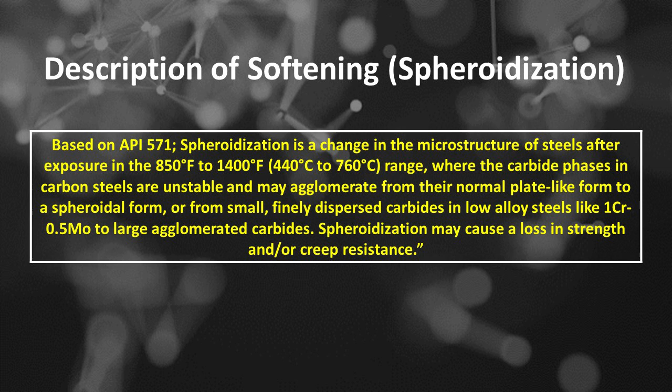Based on API 571, spheroidization is a change in the microstructure of steels after exposure in the 850 to 1400 degrees Fahrenheit, 440 to 760 degrees Celsius range, where the carbide phases in carbon steels are unstable and may agglomerate from their normal plate-like form to a spheroidal form, or from small, finely dispersed carbides in low-alloy steels like 1Cr 0.5Mo to large agglomerated carbides. Spheroidization may cause a loss in strength and/or creep resistance.

Softening, also known as spheroidization, is a type of damage that affects metals, particularly steel. It's a heat treatment-related issue that occurs when the metal is subjected to high temperatures beyond its critical temperature, leading to the breakdown of its microstructure.

In spheroidization damage, the metal's original microstructure is altered, causing the carbides to break down and transform into spherical, spheroid particles. This process occurs at temperatures typically between 550 to 700 degrees Celsius, which is below the melting point of the steel. Characteristics of spheroidization damage include: Number 1, microstructural changes - the formation of spherical carbide particles, replacing the original acicular or lamellar morphology.

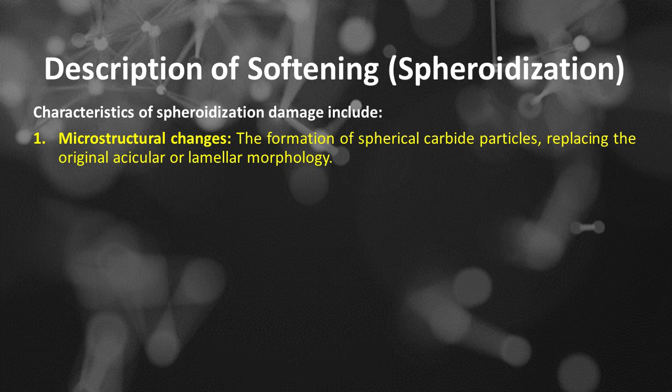Number 2 is grain growth - coarse grain formation due to the high temperatures, resulting in a more porous and less dense microstructure. Number 3 is loss of mechanical properties - spheroidization damage can lead to a significant decrease in the metal's strength, toughness, and hardness.

Number 4 is surface degradation - the formation of surface cracks, blisters, or scales, which can compromise the metal's structural integrity.

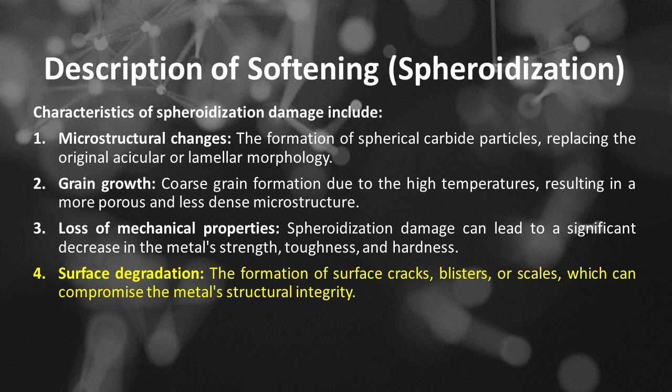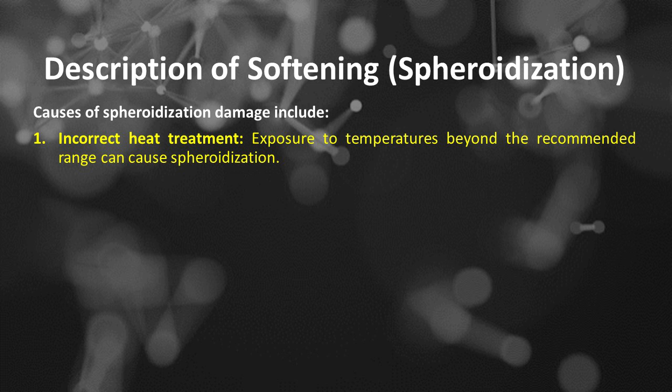Causes of spheroidization damage include: Number 1 is incorrect heat treatment - exposure to temperatures beyond the recommended range can cause spheroidization. Number 2 is insufficient cooling - slow cooling rates can lead to the formation of spheroid structures.

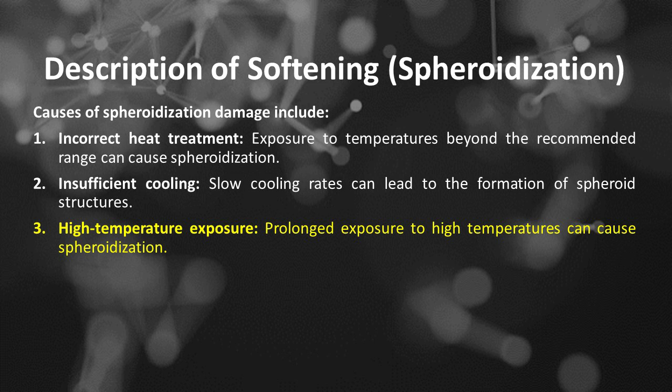Number 3 is high-temperature exposure - prolonged exposure to high temperatures can cause spheroidization. By understanding the causes and effects of spheroidization damage, metalworkers and engineers can take steps to prevent or minimize its occurrence, ensuring the integrity and performance of steel structures and components.

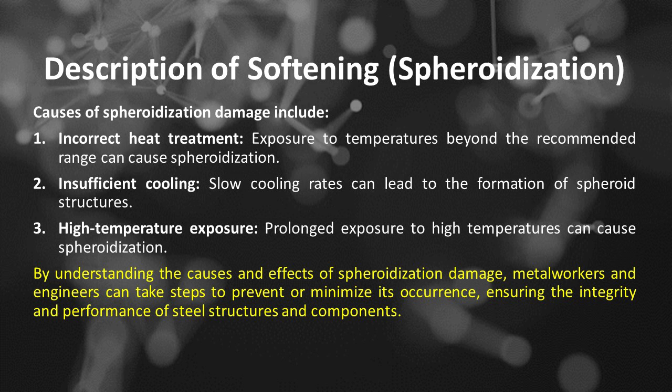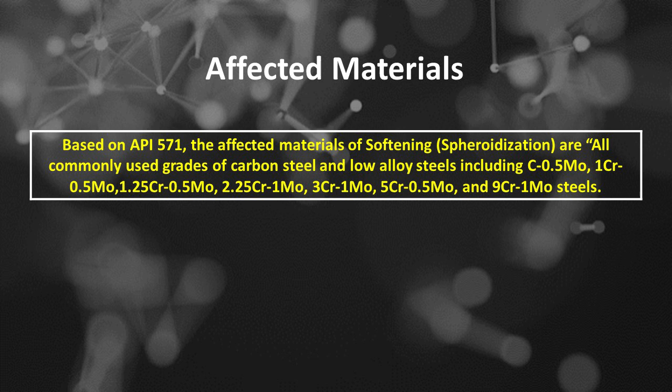Softening or spheroidization affected materials. Based on API 571, the affected materials of softening or spheroidization are all commonly used grades of carbon steel and low-alloy steels, including C 0.5Mo, 1Cr 0.5Mo, 1.25Cr 0.5Mo, 2.25Cr 1Mo, 3Cr 1Mo, 5Cr 0.5Mo, and 9Cr 1Mo steels.

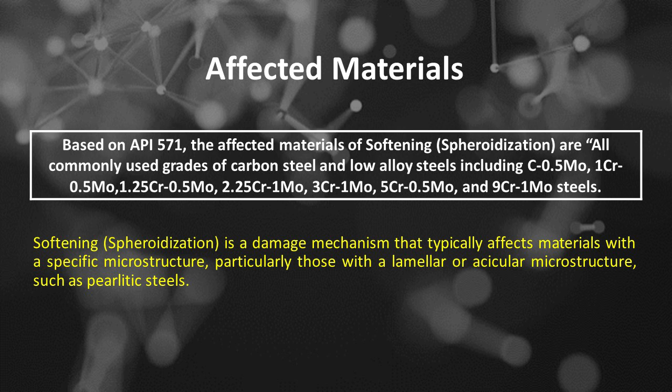Softening, spheroidization, is a damage mechanism that typically affects materials with a specific microstructure, particularly those with a lamellar or acicular microstructure, such as pearlitic steels. The affected materials can include: Number 1, pearlitic steels - steels with a pearlitic microstructure, which consists of alternating layers of ferrite and cementite, are prone to softening due to spheroidization. This includes medium and high-carbon steels, such as AISI 1040, 4140, and 4340.

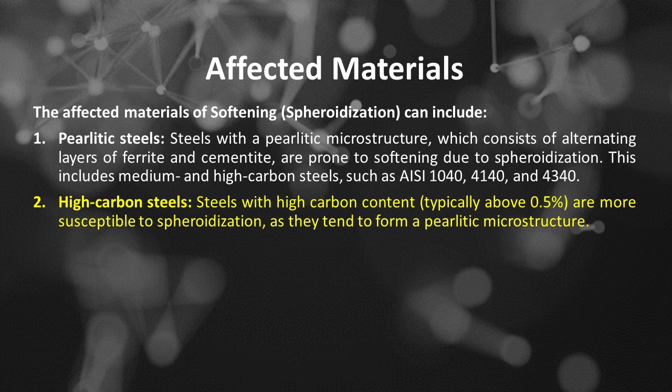Number 2 is high-carbon steels - steels with high carbon content, typically above 0.5%, are more susceptible to spheroidization, as they tend to form a pearlitic microstructure. Number 3 is medium carbon steels.

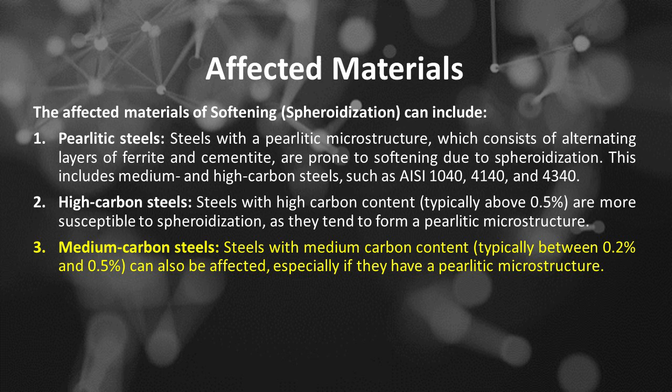Steels with medium carbon content, typically between 0.2% and 0.5%, can also be affected, especially if they have a pearlitic microstructure. Number 4 is some alloy steels.

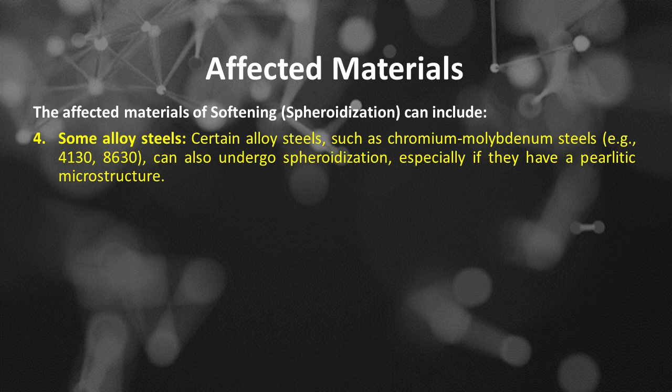Certain alloy steels, such as chromium molybdenum steels, e.g., 4130, 8630, can also undergo spheroidization, especially if they have a pearlitic microstructure. Number 5 is cast irons - some types of cast irons, such as gray cast iron, can also be affected by spheroidization, although this is less common.

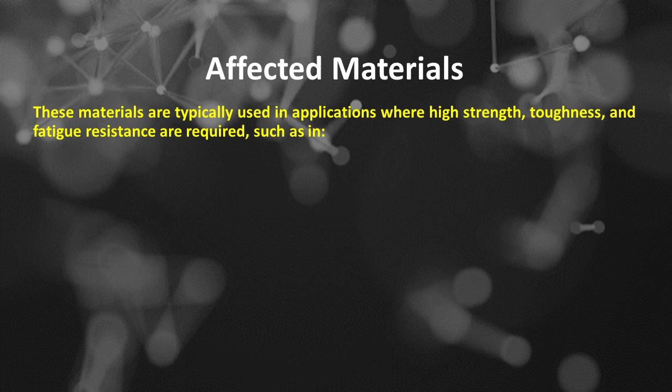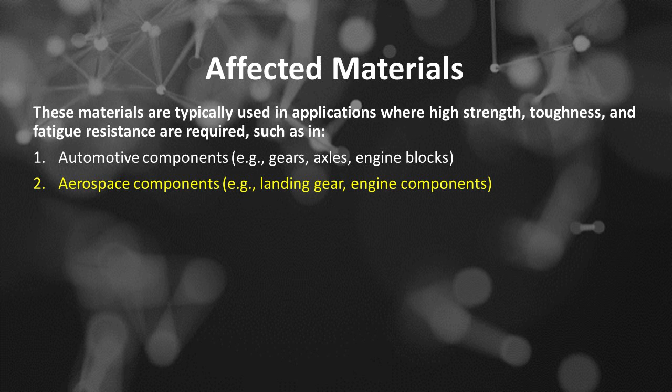These materials are typically used in applications where high strength, toughness, and fatigue resistance are required, such as in: Number 1, automotive components, such as gears, axles, engine blocks. Number 2, aerospace components, such as landing gear, engine components. Number 3, industrial equipment, such as pumps, valves, gears. Number 4, construction equipment, such as cranes, excavators.

It's worth noting that not all materials with these compositions will necessarily undergo spheroidization, as the susceptibility to this damage mechanism also depends on factors like processing history, heat treatment, and operating conditions.

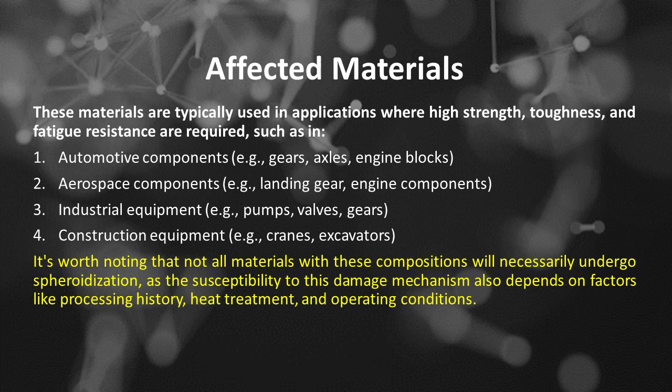Critical factors of the softening or spheroidization damage mechanism primarily refer to the process that occurs in materials, especially steels, during heat treatment or prolonged exposure to high temperatures. This mechanism is crucial in determining the mechanical properties of the material, particularly its hardness, strength, and ductility. Here are some of the critical factors that influence spheroidization.

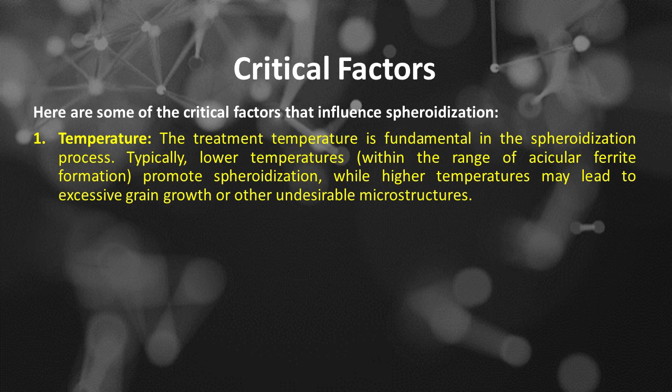Number 1 is temperature - the treatment temperature is fundamental in the spheroidization process. Typically, lower temperatures, within the range of acicular ferrite formation, promote spheroidization, while higher temperatures may lead to excessive grain growth or other undesirable microstructures.

Number 2 is time - the duration of exposure to the softening temperature affects the spheroidization process. Longer times generally lead to more significant spheroidization, changing the distribution and shape of carbide particles within the matrix.

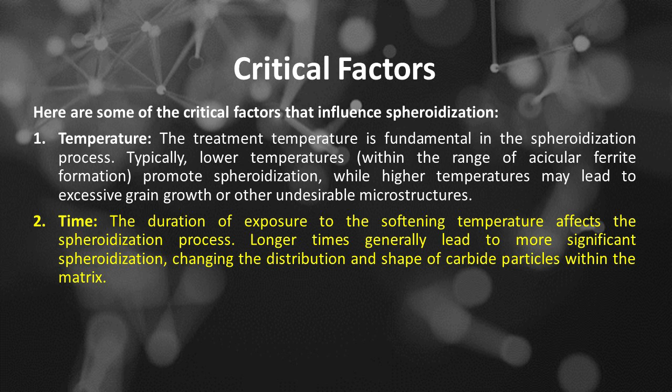Number 3 is initial microstructure - the starting microstructure of the material, lamellar pearlite, bainite, or martensite, plays a critical role in how quickly and effectively spheroidization occurs. Different initial structures respond differently to heat treatment.

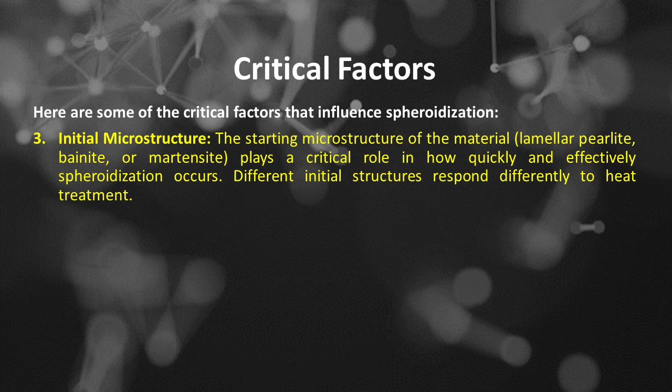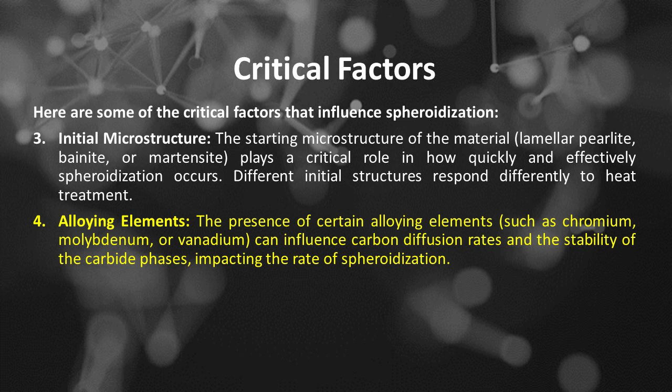Number 4 is alloying elements. The presence of certain alloying elements, such as chromium, molybdenum, or vanadium, can influence carbon diffusion rates and the stability of the carbide phases, impacting the rate of spheroidization.

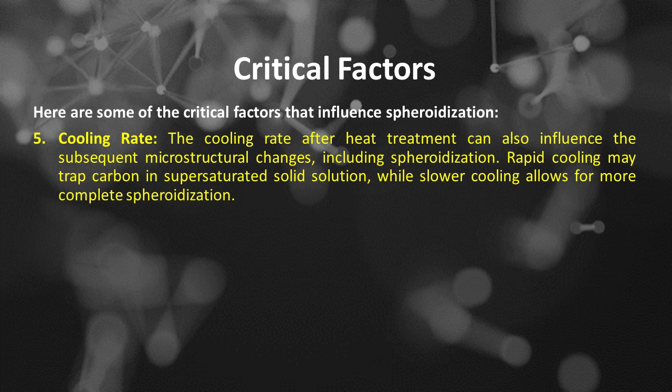Number 5 is cooling rate. The cooling rate after heat treatment can also influence the subsequent microstructural changes, including spheroidization. Rapid cooling may trap carbon in supersaturated solid solution, while slower cooling allows for more complete spheroidization.

Number 6 is stress and strain. Mechanical stresses can impact the kinetics of spheroidization. Stress can promote the movement of dislocations and boundaries, potentially facilitating the dissolution of cementite and promoting spheroidization.

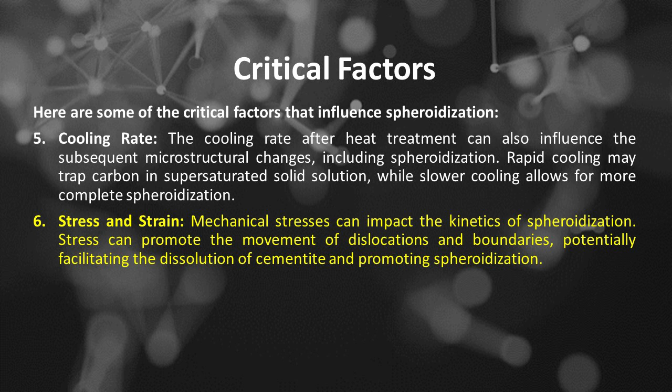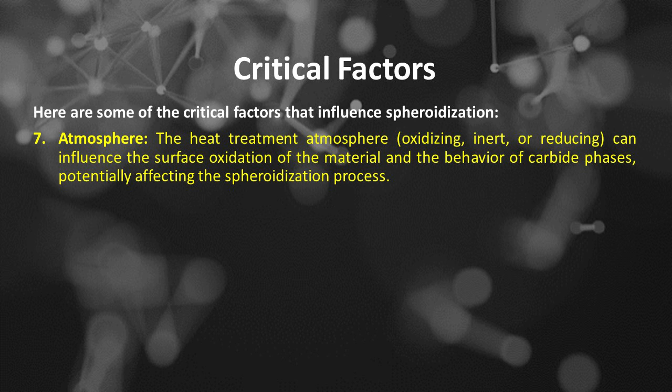Number 7 is atmosphere. The heat treatment atmosphere, oxidizing, inert, or reducing, can influence the surface oxidation of the material and the behavior of carbide phases, potentially affecting the spheroidization process.

Number 8 is grain size. The initial grain size of the material can impact its overall mechanical properties and also how easily the spheroidization process occurs. Finer grains may facilitate faster diffusion and spheroidization processes.

Understanding these critical factors is important for controlling the properties of steel and other materials through targeted heat treatments, allowing for optimization for specific applications in mechanical engineering and materials science.

Affected units or equipment of softening or spheroidization. Softening or spheroidization is a damage mechanism that can occur in equipment and systems that operate at high temperatures, particularly in the context of steam power plants, fossil fuel power plants, and other industrial processes. The affected units or equipment of softening, spheroidization damage mechanism include:

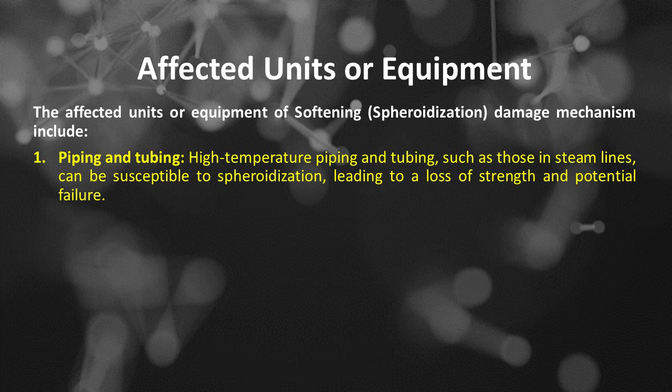Number 1 is piping and tubing. High-temperature piping and tubing, such as those in steam lines, can be susceptible to spheroidization, leading to a loss of strength and potential failure. Number 2 is boiler components.

Boiler headers, tubes, and other components can be affected by spheroidization, particularly in areas with high heat flux and temperature gradients. Number 3 is heat exchangers.

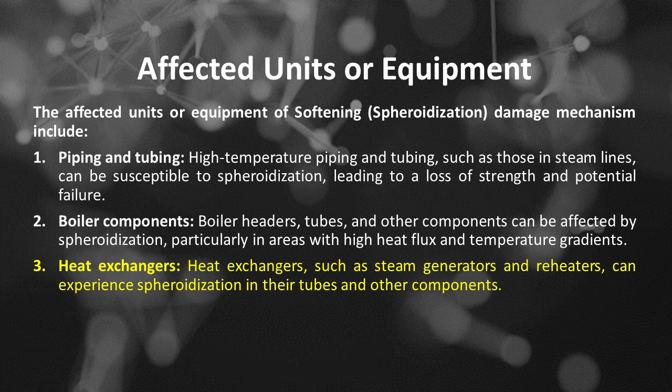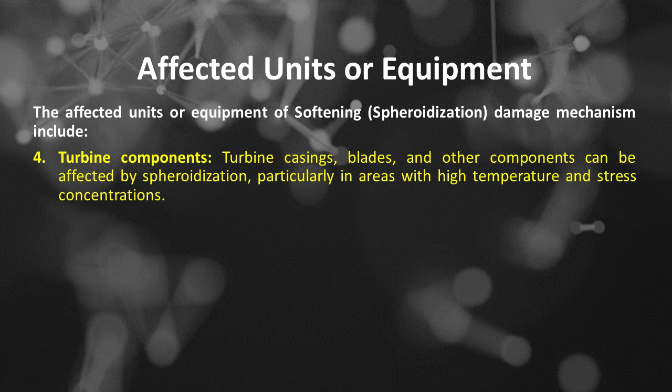Heat exchangers, such as steam generators and reheaters, can experience spheroidization in their tubes and other components. Number 4 is turbine components. Turbine casings, blades, and other components can be affected by spheroidization, particularly in areas with high temperature and stress concentrations.

Number 5 is superheater and reheater coils. These coils can be susceptible to spheroidization due to the high temperatures and thermal gradients they experience.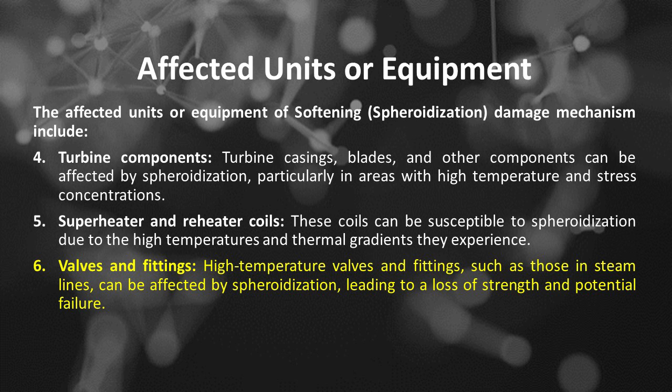Number 6 is valves and fittings. High-temperature valves and fittings, such as those in steam lines, can be affected by spheroidization, leading to a loss of strength and potential failure. Number 7 is headers and manifolds.

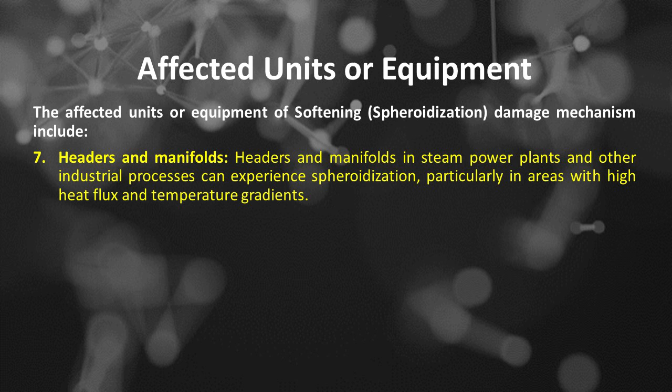Headers and manifolds in steam power plants and other industrial processes can experience spheroidization, particularly in areas with high heat flux and temperature gradients. These are some examples of the equipment and systems that can be affected by softening, spheroidization damage mechanism. It's essential to note that the specific affected units or equipment may vary depending on the industry, process, and operating conditions.

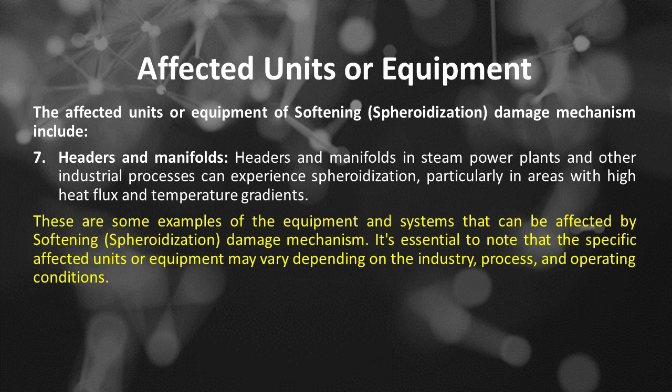Appearance or morphology of softening or spheroidization damage. Based on API 571, spheroidization is not visible or readily apparent and can only be observed through metallography. The pearlitic phase undergoes a time-dependent transformation from partial to complete spheroidization, Figure 4.3 and Figure 4.4.

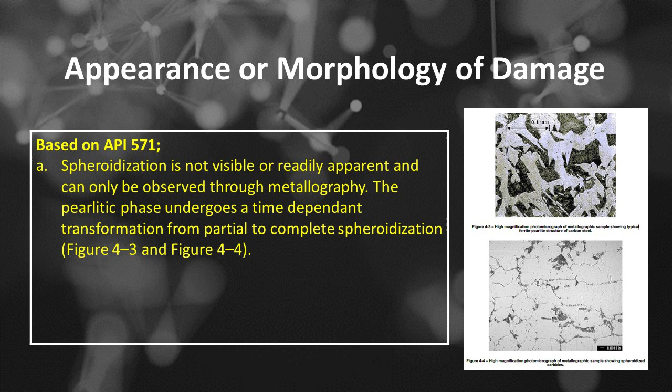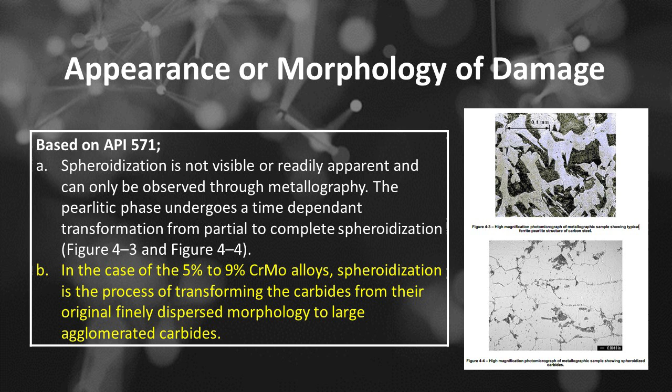In the case of the 5% to 9% CrMo alloys, spheroidization is the process of transforming the carbides from their original finely dispersed morphology to large agglomerated carbides.

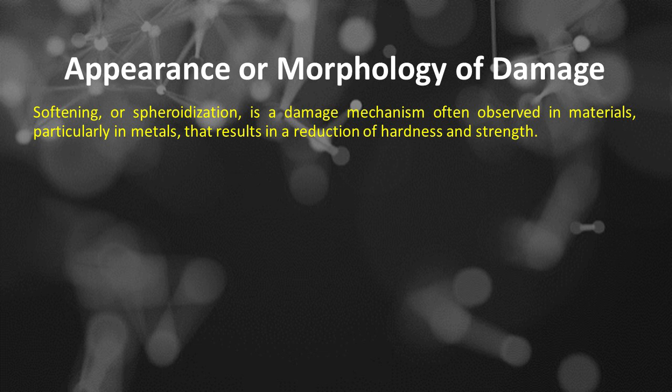Softening, or spheroidization, is a damage mechanism often observed in materials, particularly in metals, that results in a reduction of hardness and strength. This process typically involves the transformation of a material's microstructure, particularly in steels and certain alloys.

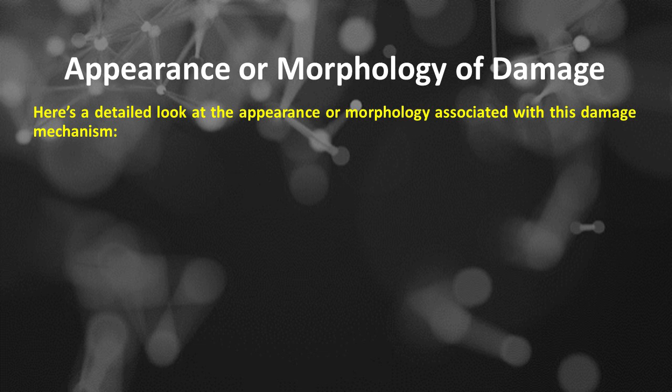Number 1 is microstructural changes. The first of microstructural changes is phase transformation. The microstructure generally transitions from a more complex arrangement, like pearlite or bainite, to rounded particles, spheroids, of cementite, Fe3C, dispersed in a ferritic matrix. This transformation can occur through annealing processes.

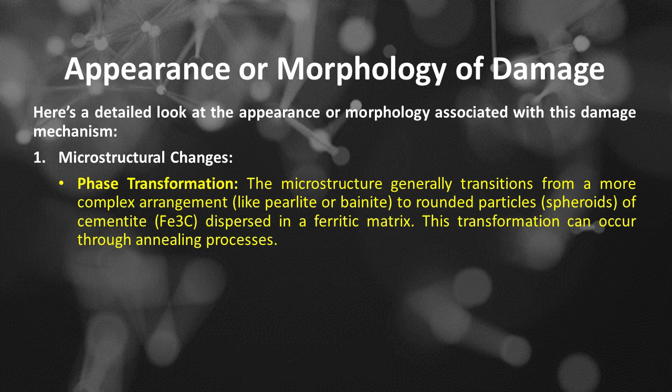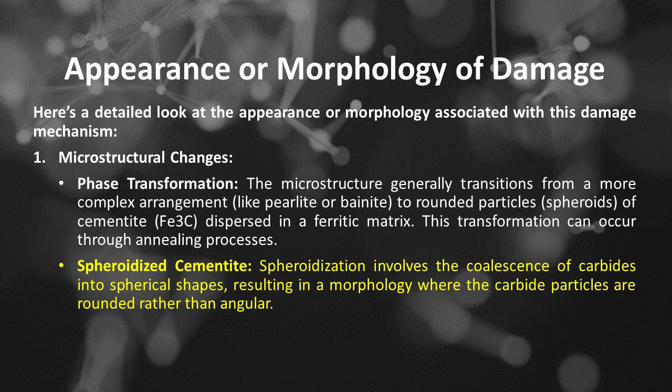The second of microstructural changes is spheroidized cementite. Spheroidization involves the coalescence of carbides into spherical shapes, resulting in a morphology where the carbide particles are rounded rather than angular.

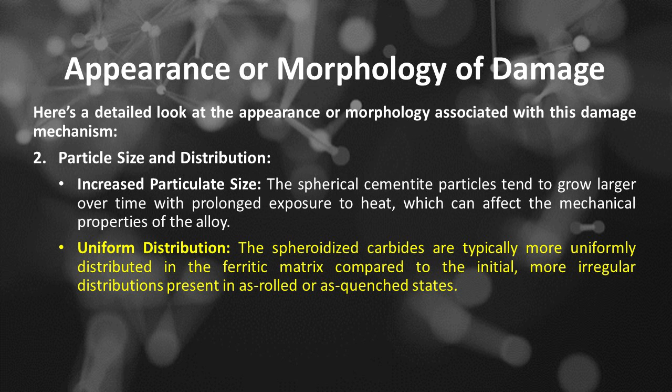Number 2 is particle size and distribution. The first is increased particulate size. The spherical cementite particles tend to grow larger over time with prolonged exposure to heat, which can affect the mechanical properties of the alloy. Uniform distribution: the spheroidized carbides are typically more uniformly distributed in the ferritic matrix compared to the initial, more irregular distributions present in as-rolled or as-quenched states.

Number 3 is reduction in hardness. As the material softens, there is a noticeable decrease in hardness. This can often be seen in hardness tests, where the values drop significantly when comparing spheroidized samples to those in earlier microstructural states, e.g., pearlite.

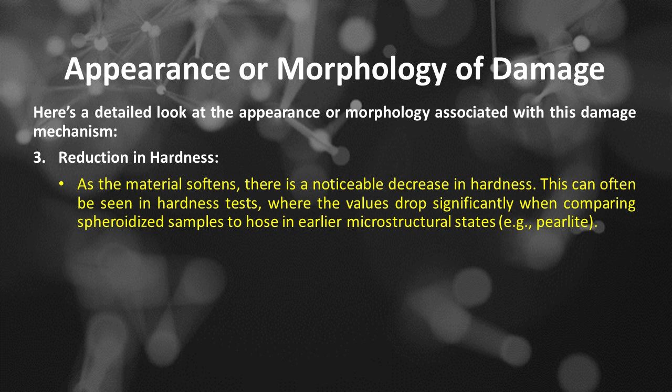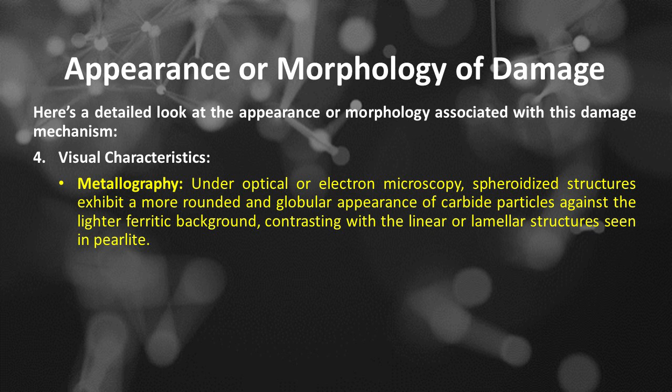Number 4 is visual characteristics. Metallography: under optical or electron microscopy, spheroidized structures exhibit a more rounded and globular appearance of carbide particles against the lighter ferritic background, contrasting with the linear or lamellar structures seen in pearlite. Fractography: in fracture surfaces, spheroidized materials may show signs of ductile fracture with dimples due to the softer matrix yielding under stress.

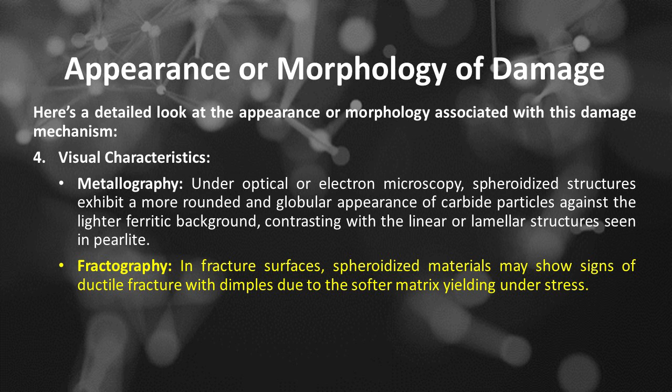Number 5 is temperature and time dependence. Spheroidization is typically promoted by long exposures to elevated temperatures. The degree of spheroidization can vary based on the specific temperatures and times used during the heat treatment process.

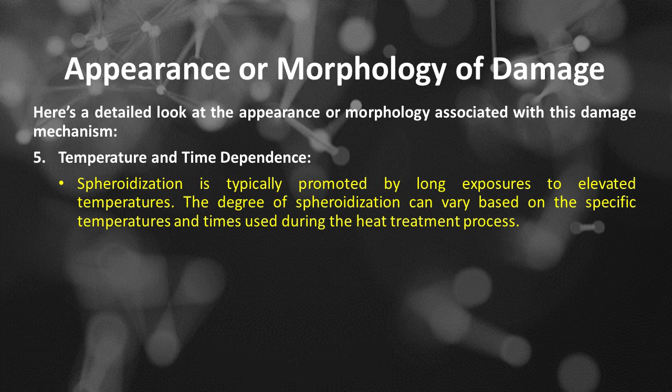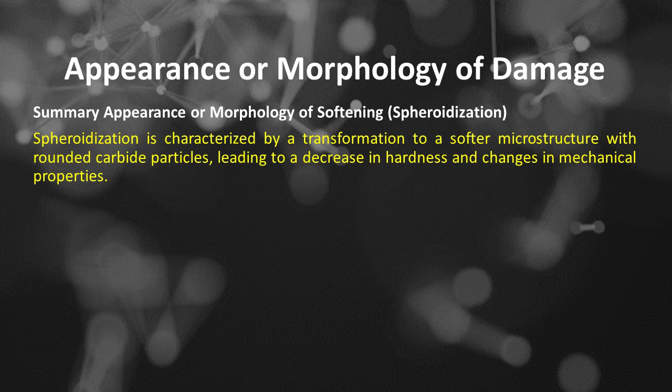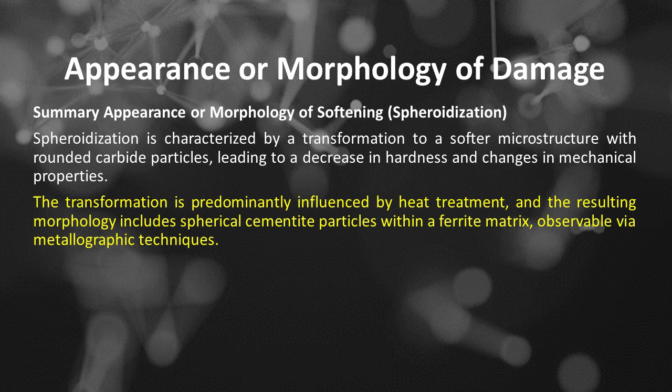Summary appearance or morphology of softening or spheroidization. Spheroidization is characterized by a transformation to a softer microstructure with rounded carbide particles, leading to a decrease in hardness and changes in mechanical properties. The transformation is predominantly influenced by heat treatment, and the resulting morphology includes spherical cementite particles within a ferrite matrix, observable via metallographic techniques.

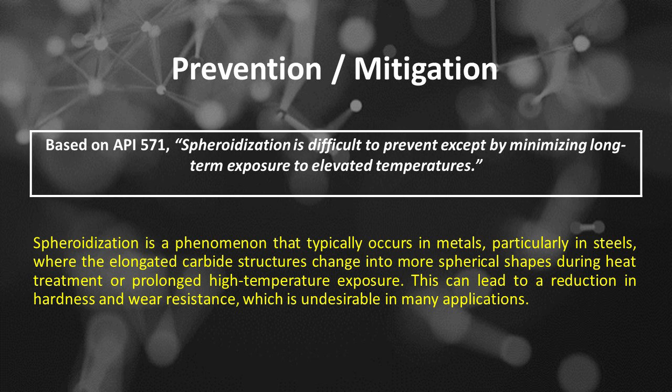Softening or spheroidization prevention or mitigation. Based on API 571, spheroidization is difficult to prevent except by minimizing long-term exposure to elevated temperatures. Spheroidization is a phenomenon that typically occurs in metals, particularly in steels, where the elongated carbide structures change into more spherical shapes during heat treatment or prolonged high-temperature exposure. This can lead to a reduction in hardness and wear resistance, which is undesirable in many applications.

To prevent or mitigate spheroidization damage, consider the following strategies. Number 1 is optimized heat treatment. Use appropriate cooling rates and heat treatment processes. Avoid prolonged exposure to high temperatures where spheroidization can occur. Implement controlled cooling processes after annealing to limit the time the metal spends in the temperature ranges that promote spheroidization.

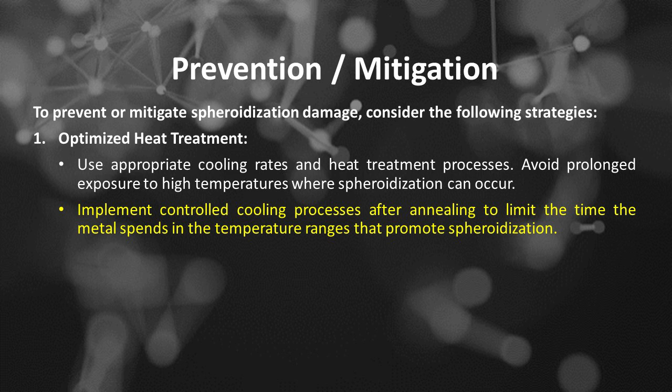Number 2 is material selection. Choose materials that are less prone to spheroidization based on their composition and microstructure. Some alloying elements can enhance resistance to spheroidization.

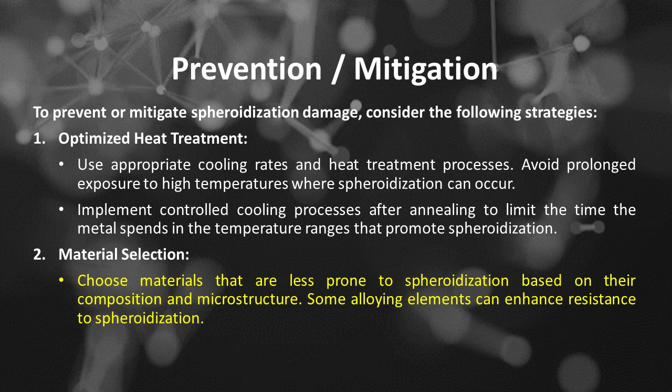Number 3 is intermittent service. If possible, limit the application of high temperatures during service or reduce exposure time to high-temperature environments. Use operational parameters that minimize heating.

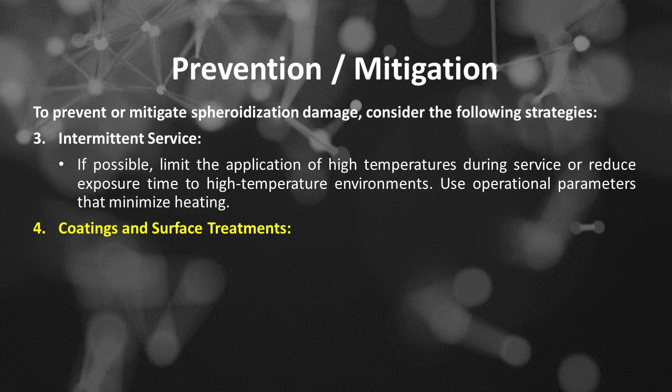Number 4 is coatings and surface treatments. Apply surface coatings or treatments that can protect against high-temperature exposure. These can act as barriers to heat transfer or provide thermal insulation.

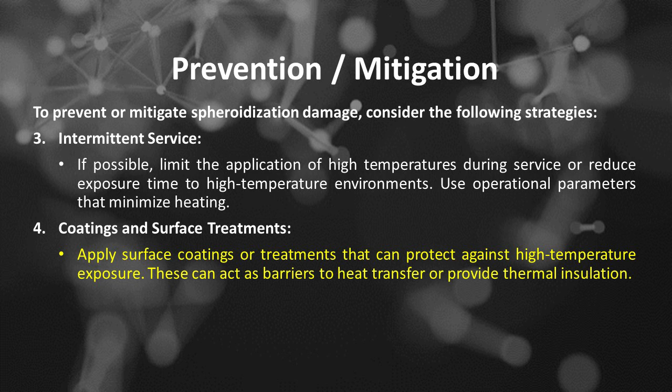Number 5 is microstructural control. Utilize processes such as quenching and tempering to create a microstructure that resists spheroidization. Maintaining a fine-grained structure and preventing the formation of large, elongated carbides can help.

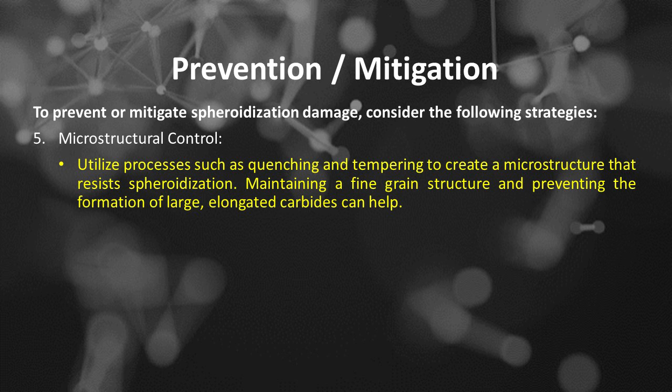Number 6 is regular monitoring and maintenance. Implement regular inspections and testing throughout the life cycle of components to detect early signs of damage or performance degradation.

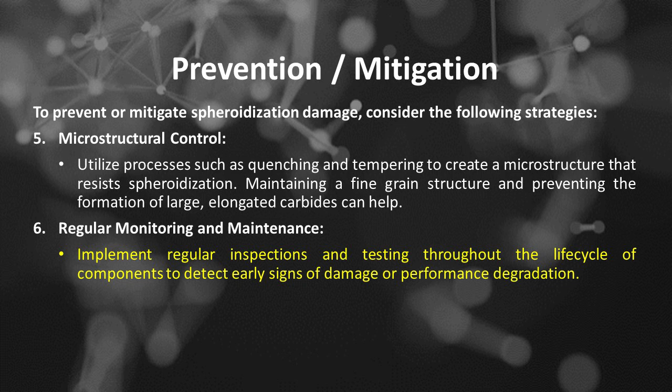Number 7 is design considerations. Incorporate design features that minimize heat accumulation and improve thermal dissipation in critical areas prone to spheroidization.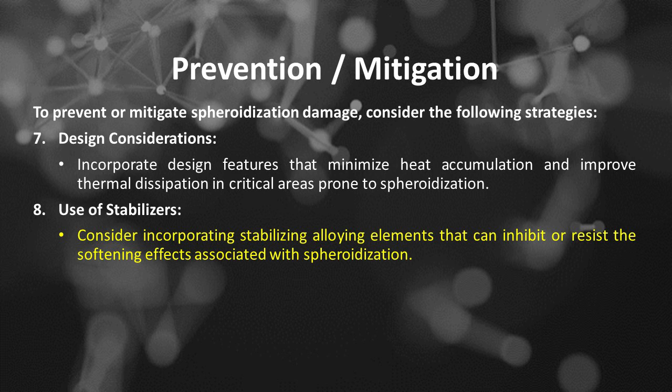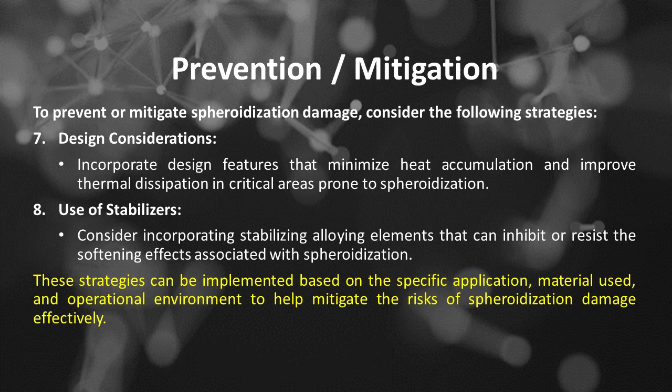Number 8 is use of stabilizers. Consider incorporating stabilizing alloying elements that can inhibit or resist the softening effects associated with spheroidization. These strategies can be implemented based on the specific application, material used, and operational environment to help mitigate the risks of spheroidization damage effectively. Inspection and monitoring.

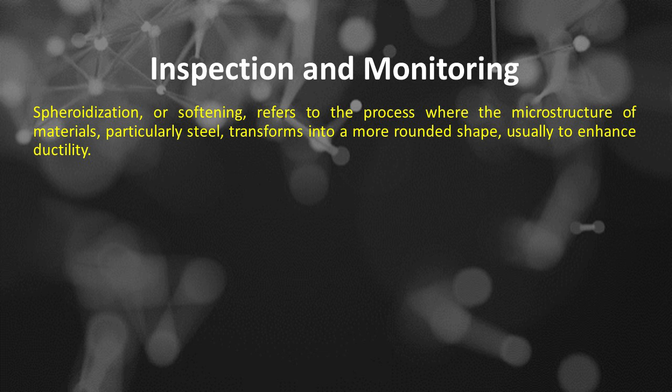Spheroidization, or softening, refers to the process where the microstructure of materials, particularly steel, transforms into a more rounded shape, usually to enhance ductility. This can occur due to prolonged heating, exposure to stress, or inappropriate heat treatment processes. Detecting spheroidization damage can involve several inspection and monitoring methods.

Number 1 is visual inspection. Surface examination. Initial visual assessments of the material can reveal signs of degradation, such as discoloration or irregular surface characteristics.

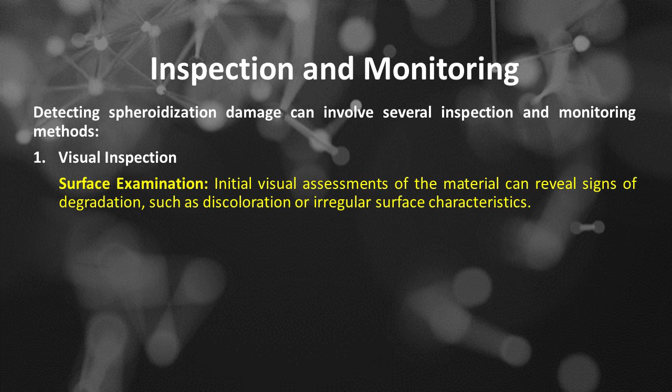Number 2 is metallographic analysis. Microscopy, optical microscopy or scanning electron microscopy, SEM, is used to examine the microstructure. Spheroidization typically shows a rounded grain structure, which can be compared to a standard sample. Etching samples. Preparing samples with specific etching solutions can help highlight microstructural features, making it easier to identify softening.

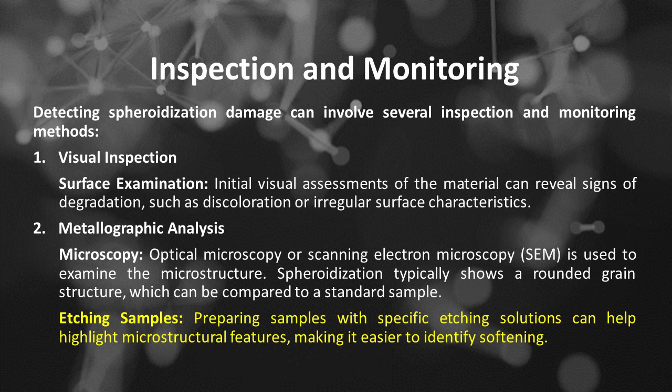Number 3 is hardness testing. Number 4 is mechanical testing.

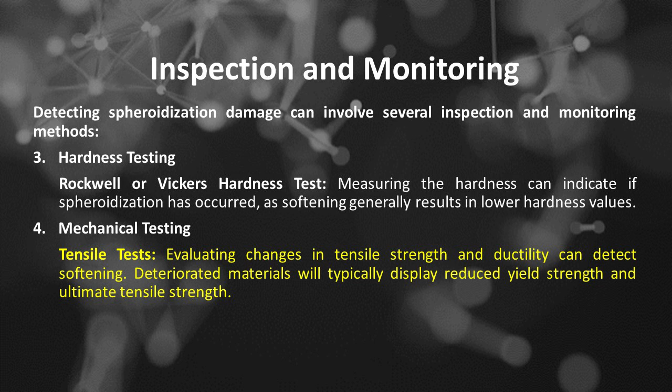Tensile tests, evaluating changes in tensile strength and ductility can detect softening. Deteriorated materials will typically display reduced yield strength and ultimate tensile strength. Impact testing, Charpy impact tests can reflect changes in toughness associated with spheroidization.

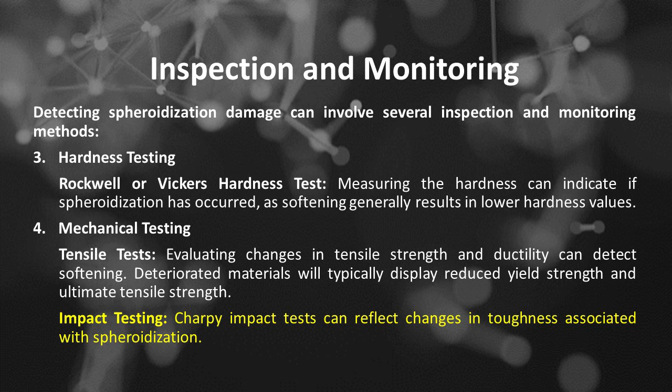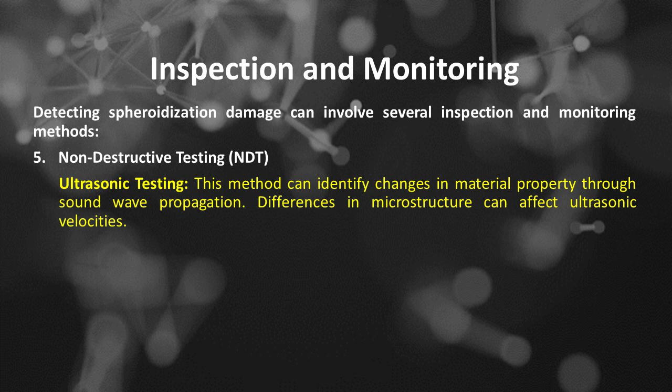Number 5 is non-destructive testing, NDT. Ultrasonic testing. This method can identify changes in material property through sound wave propagation. Differences in microstructure can affect ultrasonic velocities. Eddy current testing. This technique can detect alterations in electrical conductivity related to changes in microstructure and can be used for surface and near-surface assessments.

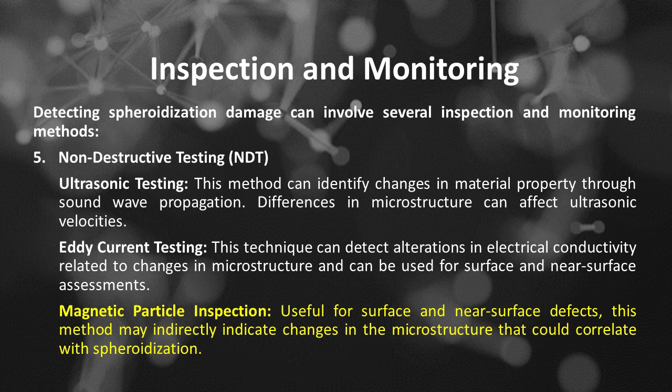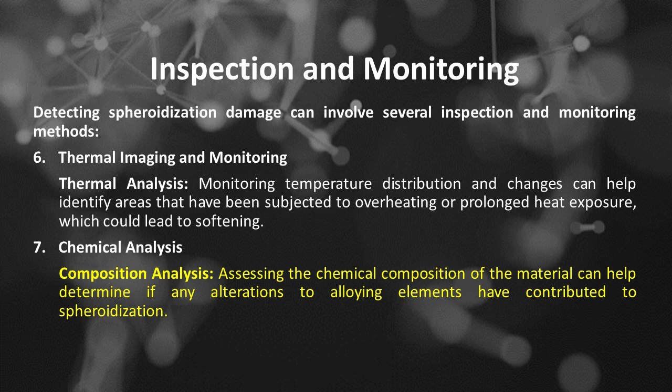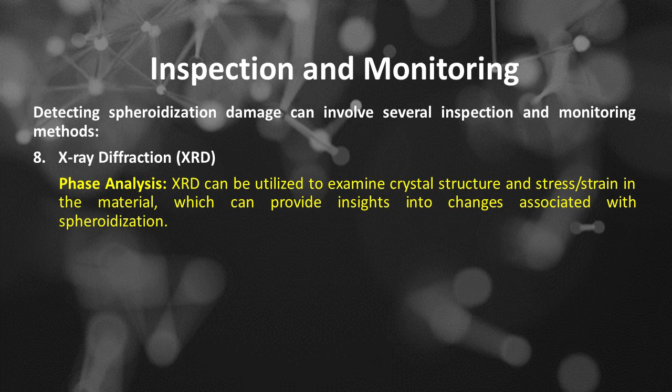Number 7 is chemical analysis. Composition analysis. Assessing the chemical composition of the material can help determine if any alterations to alloying elements have contributed to spheroidization. Number 8 is X-ray diffraction or XRD. Phase analysis. XRD can be utilized to examine crystal structure and stress/strain in the material, which can provide insights into changes associated with spheroidization.

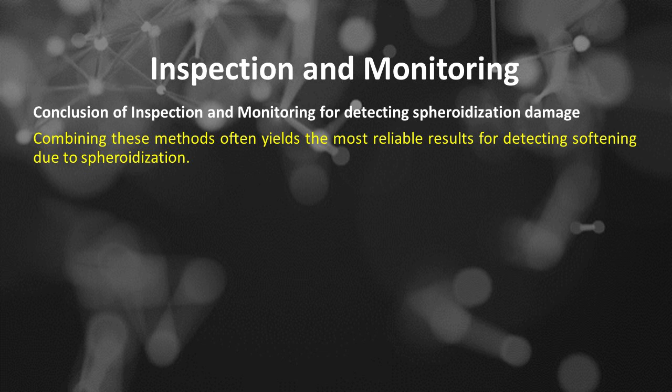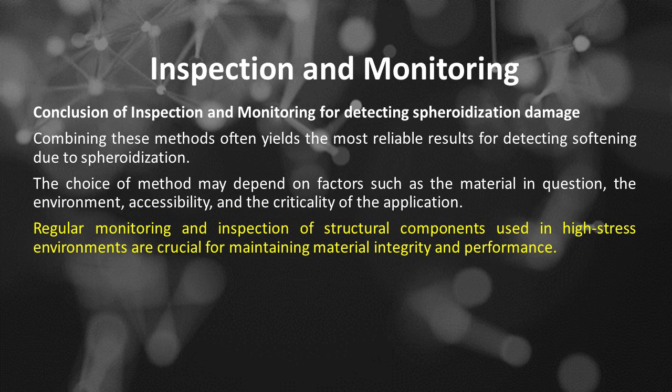Conclusion of inspection and monitoring for detecting softening or spheroidization damage. Combining these methods often yields the most reliable results for detecting softening due to spheroidization. The choice of method may depend on factors such as the material in question, the environment, accessibility, and the criticality of the application. Regular monitoring and inspection of structural components used in high-stress environments are crucial for maintaining material integrity and performance. Thank you.